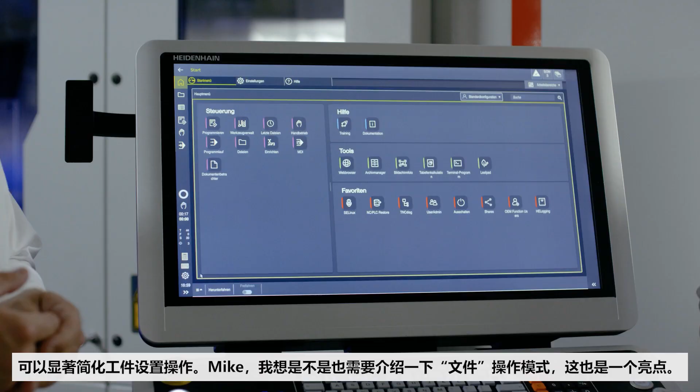Mike, I'd say it's time for the Files operating mode, since there's also interesting things there. Here we also see some design changes. I'm looking at a preview of my 3D model, which I can also view from various angles. And so I get an overview of what needs to be done next.

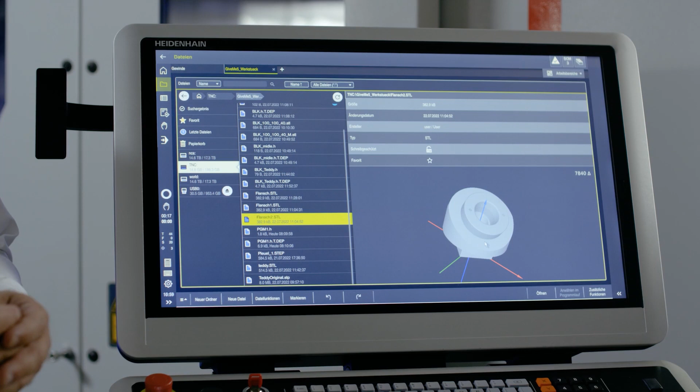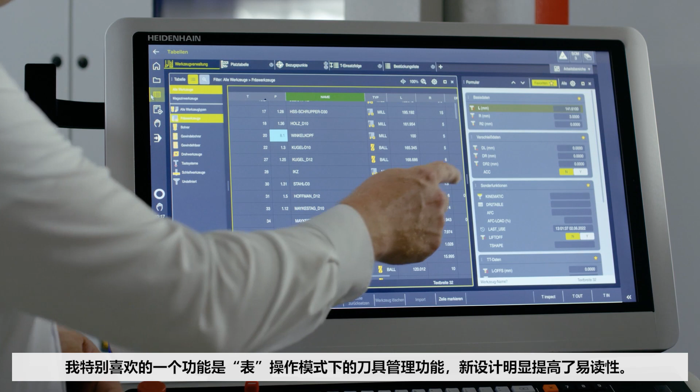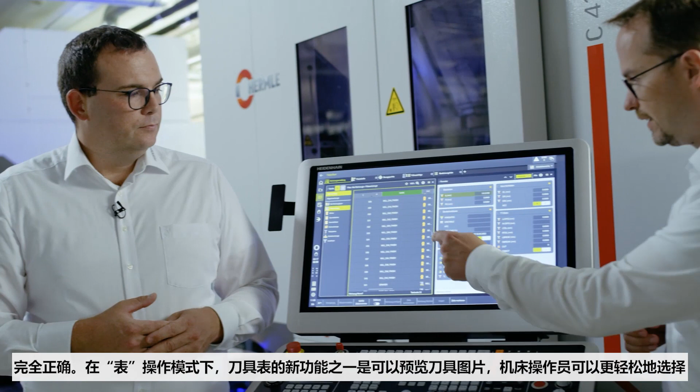What I really like a lot is the tool management in the Tables operating mode, where the redesign improves readability. Here we also try to integrate more pictures and work with colors, so that the machinist can see the information that he or she needs as quickly as possible. Exactly. One new feature of the tool table in the Tables operating mode are preview pictures of the tools, making it much easier to find the correct tool.

So, let's continue with programming. As Mike said, the new NC sequences function is quite exciting. Yes, I like this very much, especially while programming. I can now store NC sequences that I then call directly through insert NC function. But what are NC sequences? NC sequences are part of an NC program.

For example, they can be the blocks needed to activate tilting of the working plane. They can also be entire function or technology packages, such as with optimized contour milling. There we have a combination of various cycles and tools, which I store as needed. And so in daily programming, I have a finished program much sooner.

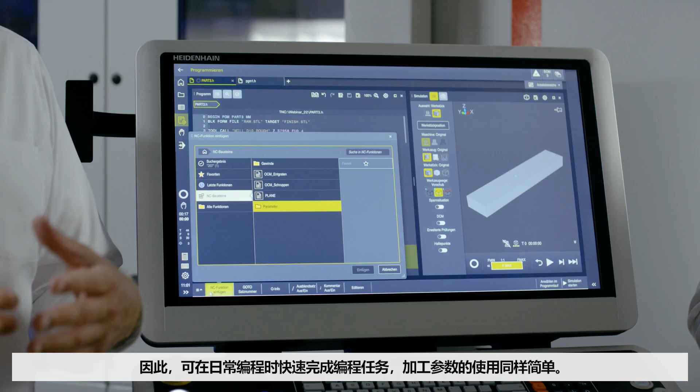It's just as easy with technology data, such as for thread cutting. I just say, okay, I know exactly which tools and cycles I need to produce an M3 thread, and then I simply store the entire combination of cycles and tools as an NC sequence.

This is very easy to do. I simply mark the section in the NC program. Then I use the Create NC Sequence button. I just need to enter a name. That's good. And then Create.

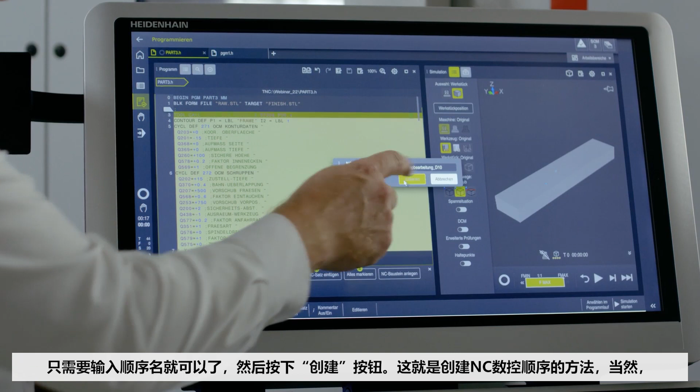And that's how to create an NC sequence, which of course can also be modified later. They're not hidden somewhere in the system. Instead, I can expand, correct, or modify these NC sequences at any time, depending on what the current process needs.

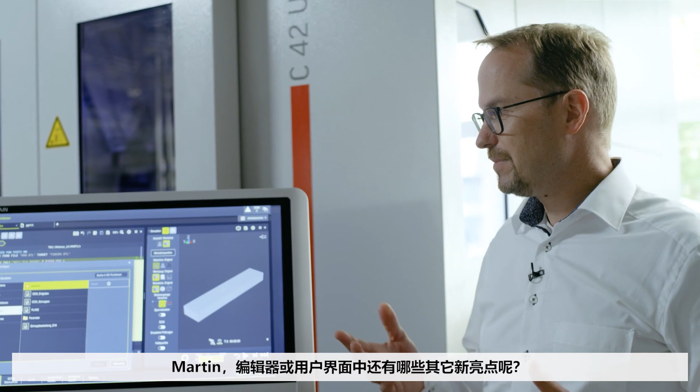Martin, what else is new in the editor or elsewhere on the user interface? One thing that's very useful and exciting is the new workspace called Documents. Its aim is to get you on your way to paperless manufacturing. All necessary documents, such as the workpiece drawing, Word files, Excel files, or image files, perhaps the clamping situation, can be opened in the new Documents workspace, right next to your editor operating mode. Simply copy and paste values directly to the NC program.

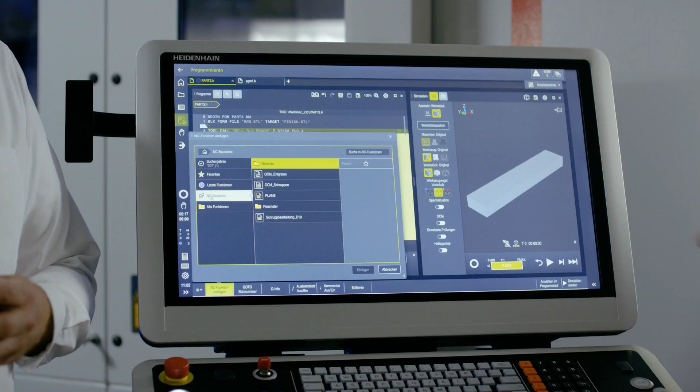Mike, let me show it quickly. I'll just close your various functions here, open the Documents workspace, and you see, here's already a PDF. By chance, it's the drawing to exactly this workpiece. It automatically adjusts its size to fit within the space available.

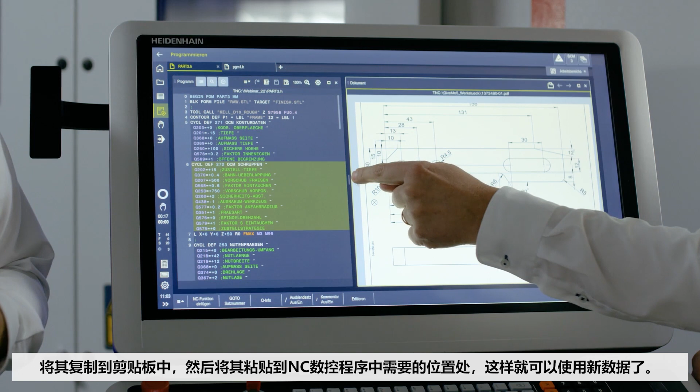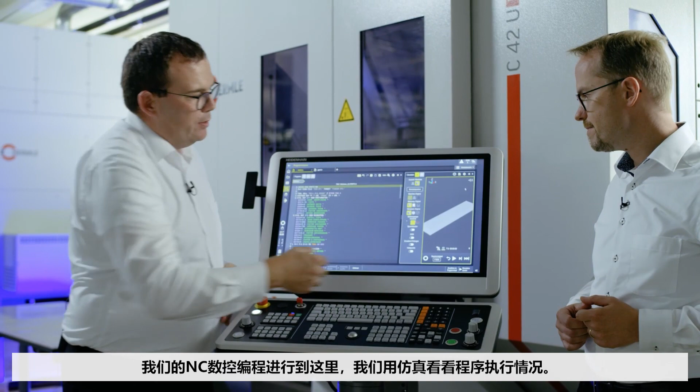And for example, here we mark a value in the PDF, copy it to the clipboard, and then we can paste it, for example, to the desired position in the NC program, and then work with the new value. So we're doing our part to support paperless manufacturing. Since we've already gotten this far with our NC program, we can look at the simulation. Martin, please make the workspace bigger and start the simulation.

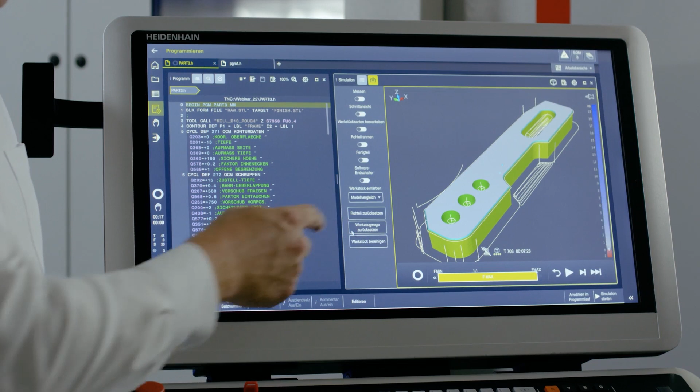Exactly. So we see here the complete simulation with all tools is run through, the entire workpiece. And now I can check whether everything is right. I already entered the finished part in the program's header and can now compare the models. Here we see some red in the scale, meaning that too much material has been removed. I can use the measurements to find out the exact block for this machining operation.

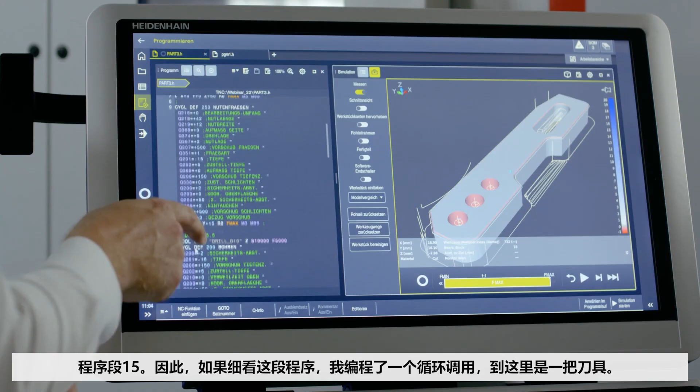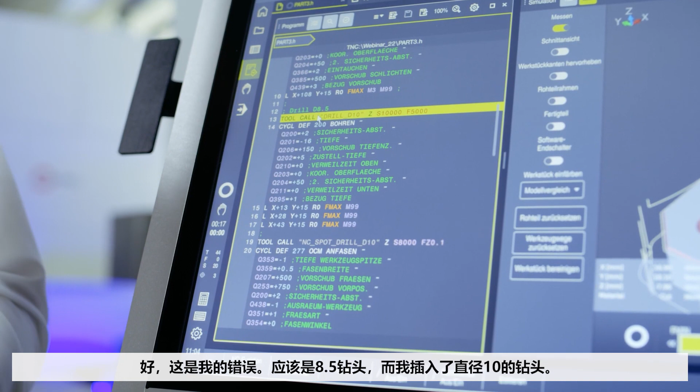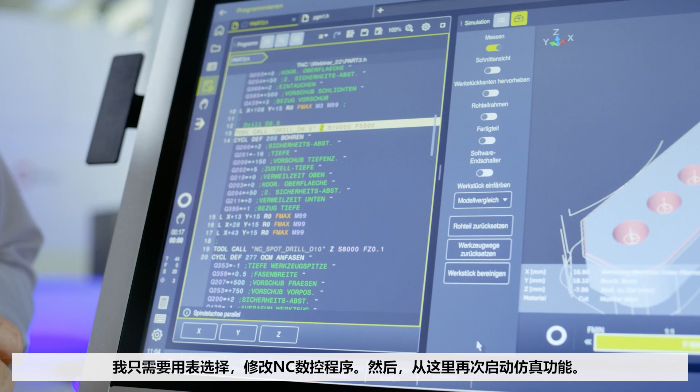Aha! The drill holes. Too much material was removed. That's block 15. So if we take a look at it, there's my cycle call, a cycle, and up here, a tool. Okay, that's my mistake. Instead of an 8.5 bit, I inserted a bit with a diameter size 10. I'll simply use the table selection to correct that in my NC program, and then start the simulation again from here.

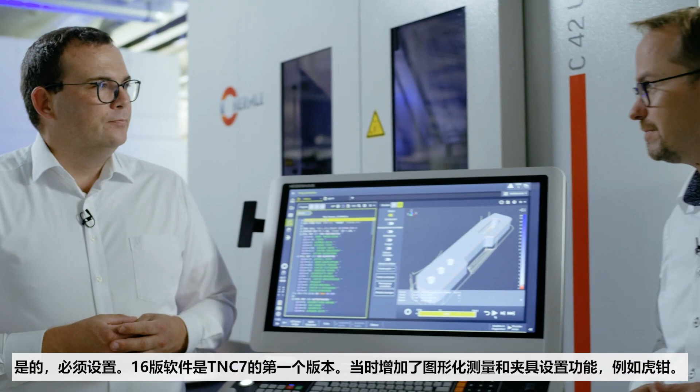This machining operation now looks good. So we can move on to Program Run, where the workpiece will be machined. But one last step is missing before we can begin machining. Martin? Right, we have to set it up. Software version 16 was the first one for the TNC7. There we integrated graphical measurement and setup of work-holding equipment like vices.

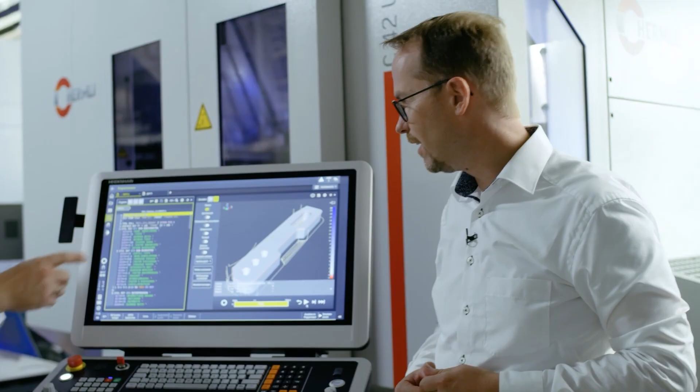With version 17, we've gone one step further. A very important additional feature is graphical measurement of workpieces themselves. Here's a brief example of how that works. Mike is already on his way there. First into the manual, and then into the setup area. So here are lots of setup cycles.

Until now it had been like this. Once I had set up the workpiece, I had to know what all I wanted to do with the workpiece. Maybe first compensate for a possible misalignment, and then align the coordinate system, then set a preset. The machinist had to know all this and do it step by step in the right sequence in order to ensure that the workpiece was actually measured correctly.

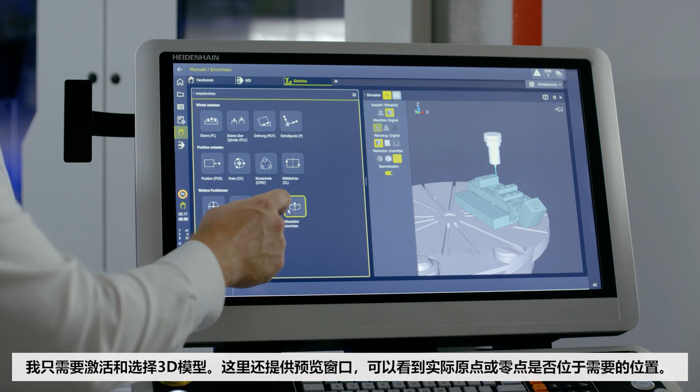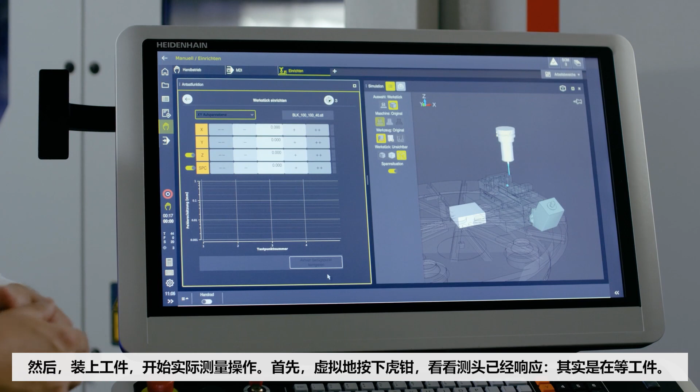The TNC7 makes this much easier with the Workpiece Setup function. I simply activate it and then choose a 3D model. There's also a preview window here so that I can see whether the datum or 0 point is there where I need it. So then I take this workpiece and can start with the actual measurement process. First, it is virtually pushed into the vise.

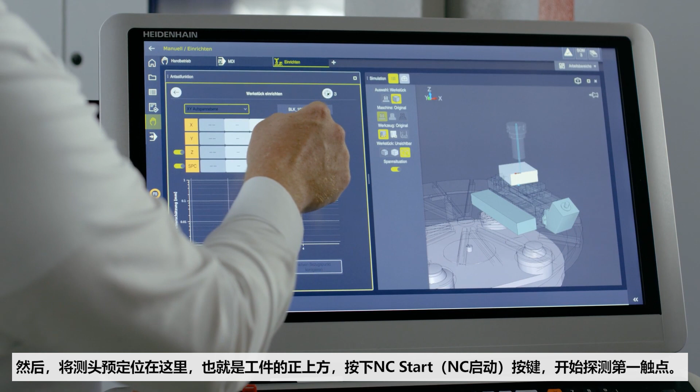And we see that the touch probe has already reacted. It is literally waiting for my workpiece. Then I pre-position the touch probe here so that it's directly above the workpiece. And then I can already press NC Start to trigger probing at the first touch point. Then I position the touch probe to the second side, and Martin can press NC Start to probe the workpiece again.

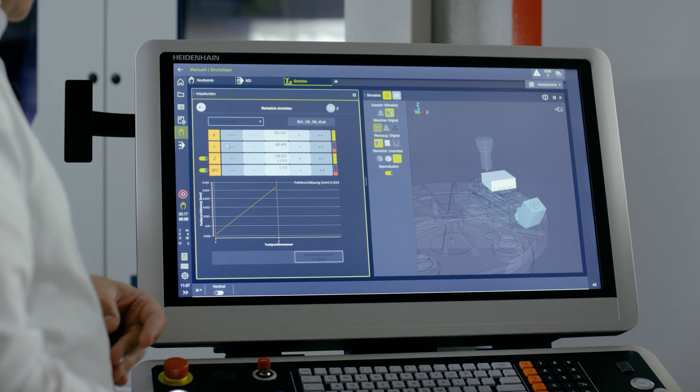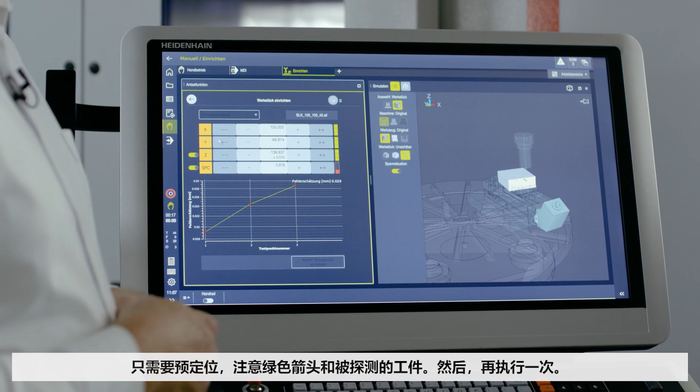This means that I don't need to worry about which probing function is programmed and run in which sequence. Simply pre-position, pay attention to the green arrow, and the workpiece is probed. And then we can do it again. Using the traffic lights at the left, we can see that almost all degrees of freedom have been determined. Now we just need the rotation. The last touch point, which I set here, captures the rotation, and on the left you see everything is green,

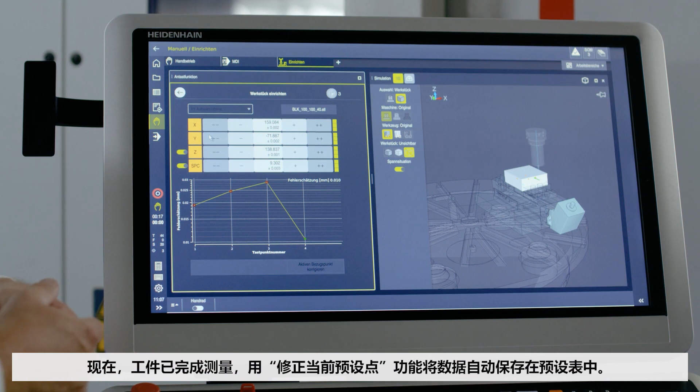a perfectly measured workpiece. So, the workpiece is now completely measured, and with correct active preset, I automatically save the values to the preset table. The workpiece is then also measured in place in the vise, meaning everything I need for collision monitoring is taken care of. Collision monitoring for all the machine elements, together with the vise and other equipment, as well as the material removal simulation for the workpiece. Now I can run and test the entire process.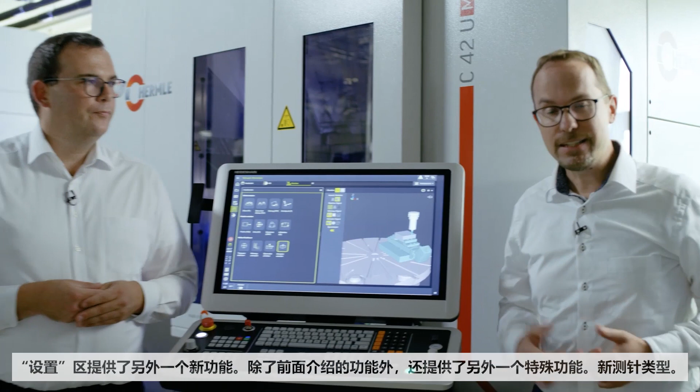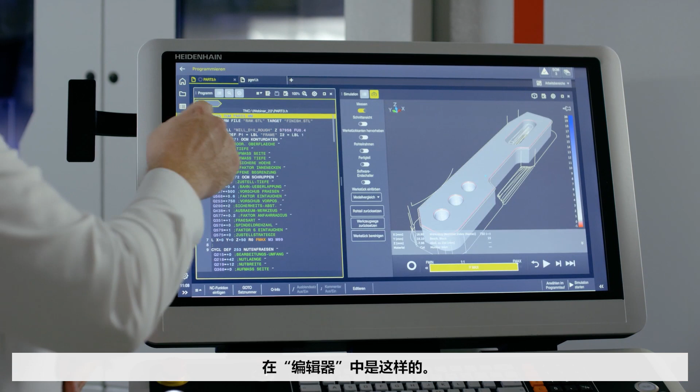There's one more new thing in the setup area. In addition to what we've already shown you, we integrated one more special feature, a new type of probe contact. Well, two actually. The TNC7 now also supports L and star styli with the corresponding probing cycles. Here's what it looks like in the editor. Mike, open it please. Exactly.

Here we see the complete support for L and star styli. This means that they can be calibrated and be integrated into programs both for manual operation and also for automatic operating modes. This is very important for workpieces that can't be probed with normal styli. That's why these special types are now supported.

So, I'd say that those are the most important new things in the TNC7 software version 17. Of course, there are some small things under the hood and also on the user interface that we haven't shown you. The best way to learn about them is by working with the TNC7. The TNC7 programming station will soon be available for downloading from the Heidenhain website. Naturally, you'll find a summary of all this there as well. All of the information about the TNC7 is clearly structured and ready for you to read or watch as you please.

I'll briefly sum up what we showed you today. Software version 17 of the TNC7 includes some design changes, including the dark mode possibility. You see it right here for adapting the TNC7 to low lighting conditions. Innovative new functions are available in the editor, such as the NC sequences function for reusing frequently needed functions. And third, exciting new possibilities for graphical measurement and setup at the machine. With DCM V2, we introduced graphical setup of work-holding equipment. And in software version 17, we added graphical measurement of workpieces.